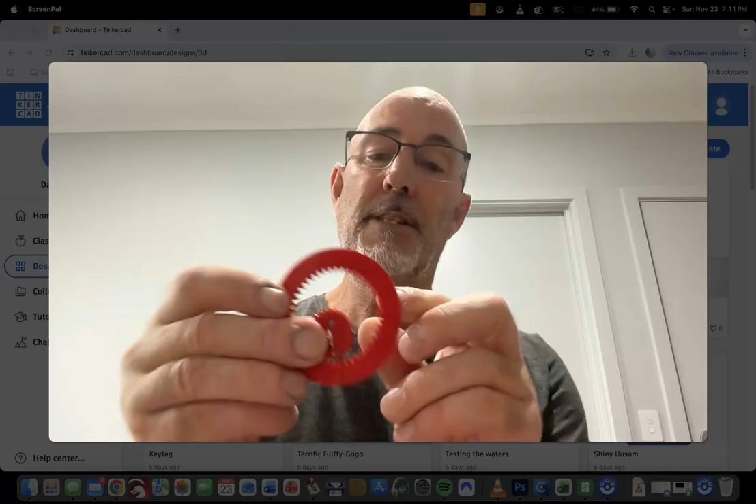This week, a simple task using the skills you've done already. I'm going to make a fun thing - you go, ooh, a gear, and ooh, another gear, but when you put them together, kids love these things. It's a Spirograph, or my version of one, using a couple of gears and a cylinder. Doesn't take long to make, doesn't take long to print. If you're doing these as a class set, kids love designing them and then making cool patterns with them. So let's make a Spirograph - it won't take you long at all, and it won't take the kids long either.

So into Tinkercad, like so. Alright, so we're going to use some of the readily made features or shapes in Tinkercad today.

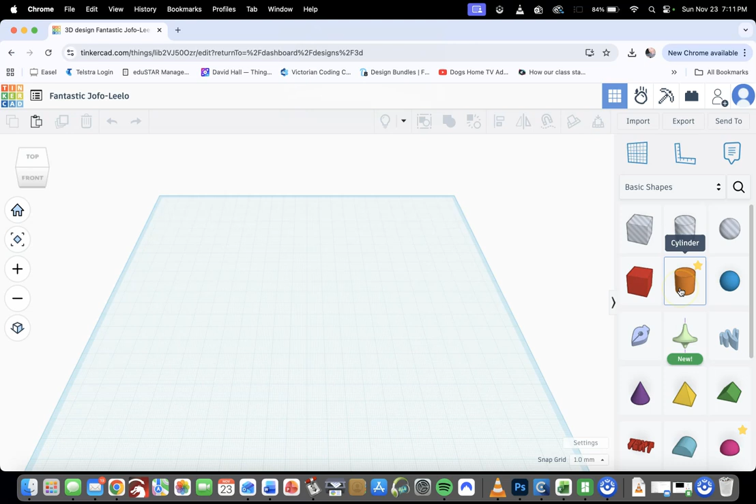To start off with, we're going to drag a cylinder onto the work plane - it doesn't matter where we put it - and resize it to be 70 by 70, and make it 3mm thick. Not too fat, not too thin, just right.

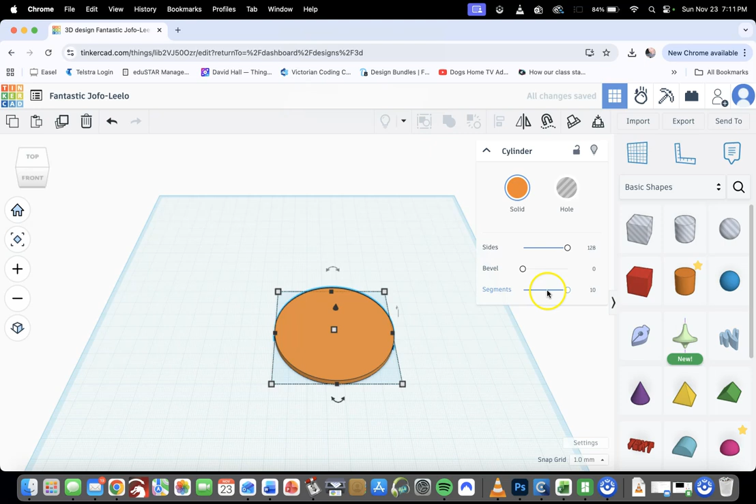We're going to turn our sides up to be the maximum and our segments up to be the maximum. I haven't done a bevel on this - you probably could if you wished, but I haven't. So that's our first component made, 70 by 70 by 3.

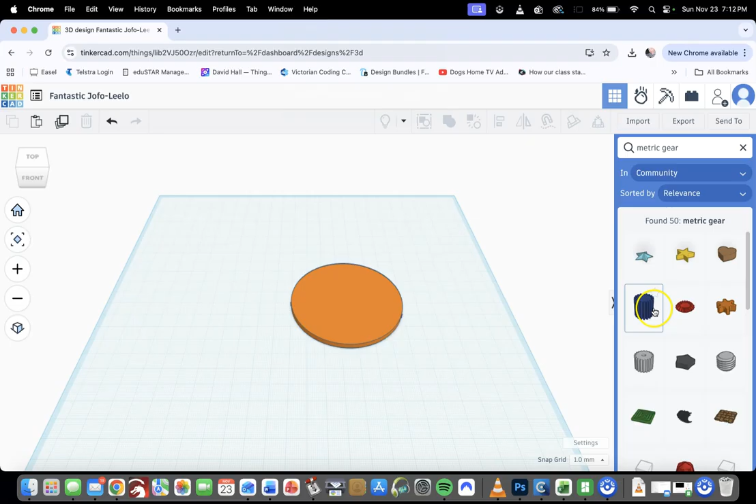The next one, we're going to go over to the search here and type up metric gear. You'll get a few things like this, and the two that we want are this one and this one. So we're going to drag this blue one out, like so, and we're also going to drag this one out, like so.

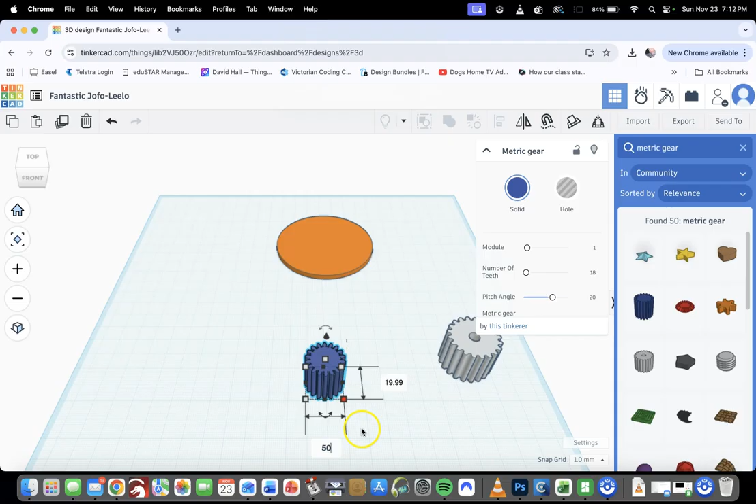This one is going to become our little wheel that you put your pencil in and draw around. This one is going to become the center. So if we click on this one, I'll move it up the front, move that to the back, and we're going to resize this to start off with - it'll be 50 by 50, 50.

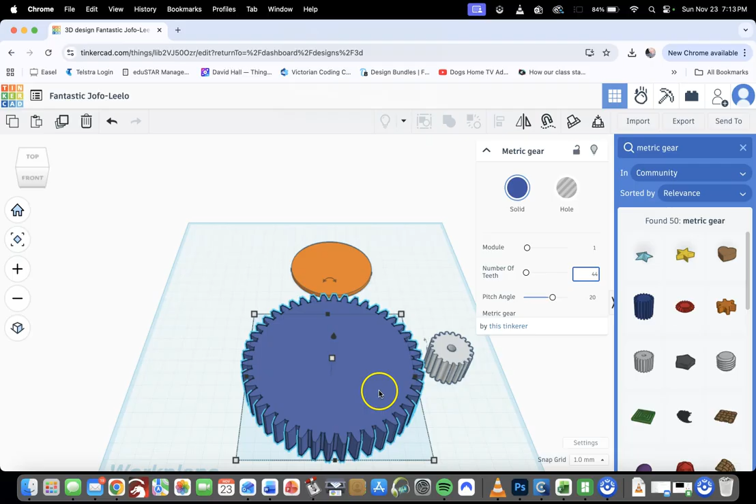I'm not going to worry too much about it, because as soon as I change the teeth on this, which we have to, it changes the dimensions as well. So we're going to change the teeth over here to be 44, like so. As you can see, it's smashed it out and made it huge. So we're then going to resize it to be 50 by 50. I don't know why it does that, but anyway, it does.

So 50 by 50, and now I can make it 3mm thick. This is going to be our center piece. So that's the metric gear with the teeth that are 44.

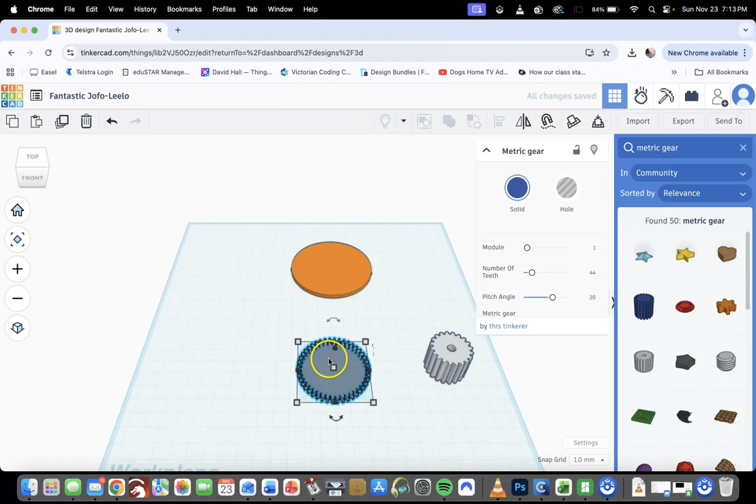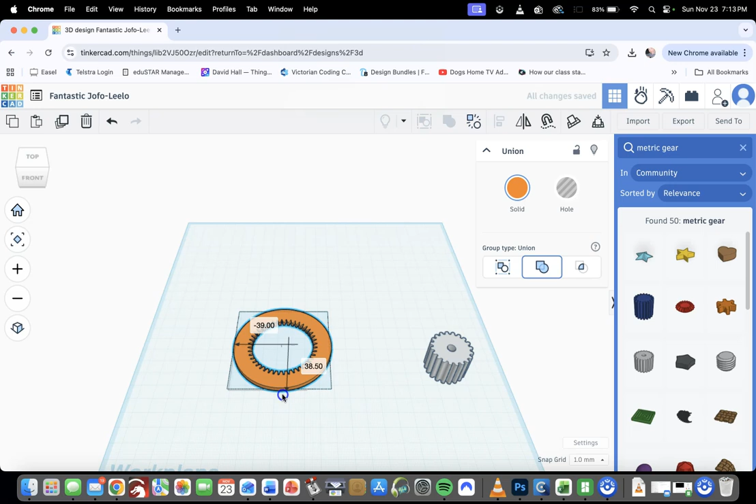And we need to turn it into a hole. I'm going to press the H key. And we need to align these two and group them, so we're going to put these two together. Press our align tool, hit center, and then group - union group. And that cuts out the center bit so that we've got our wheel that we're going to run around the inside of.

Now for this one - I told you this is not going to take a long time. The amount of teeth on this one - I did a little bit of research, and you might be going, how do you know it's going to mesh? Currently it doesn't, well it kind of does but not overly well. So I changed the teeth to 25.

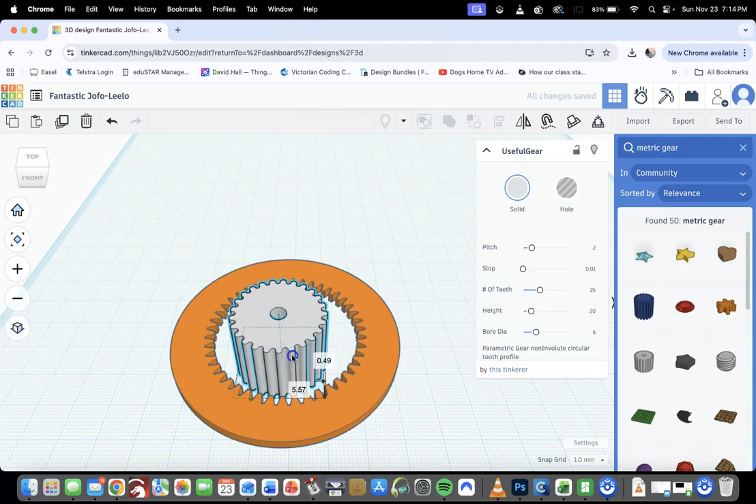And then we changed the diameter of this to 26 by 26, like so. You'll see as you drag it in, the mesh is pretty good. We also want to change the thickness to be 3mm, same as everything else, like so. So there is the center wheel - you can see the teeth mesh just nicely, and we'll drag it in, and yep, that's it.

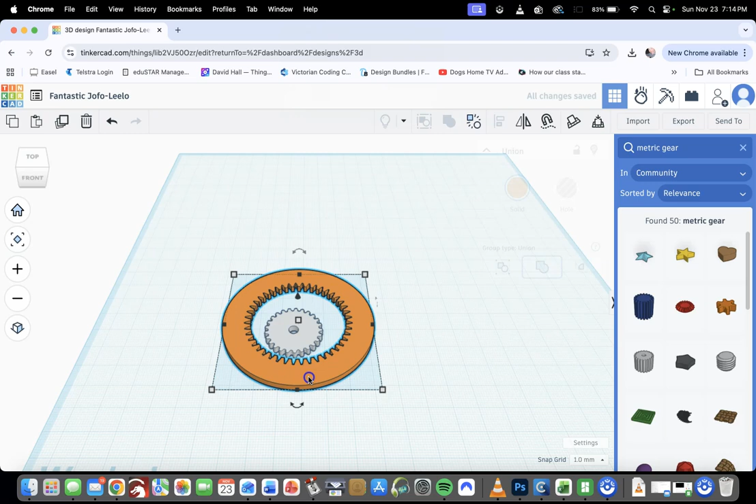So 70 by 70 for this one, 26 by 26 for this one, 25 teeth and 44 teeth on the inner wheel. Now I'm just going to drag this out, drag this over to the side. Because that gear is in the center of that wheel, it will only draw a circle, so we want to actually have it do some cool patterns.

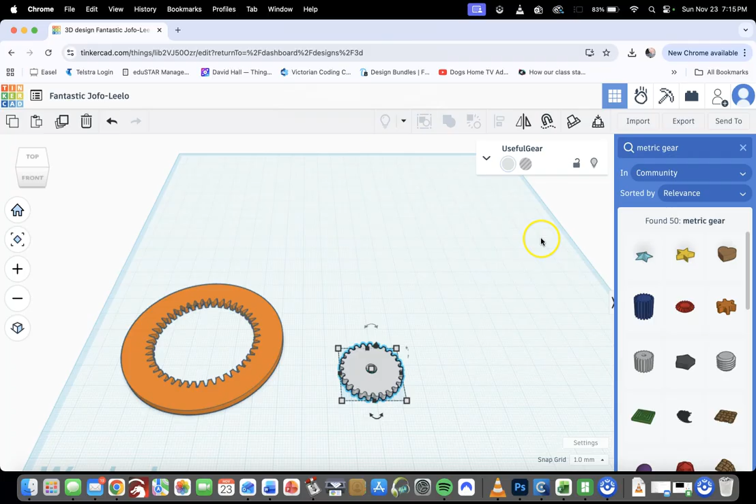So if we go back to basic shapes, we're going to drag out a cylinder, and change the size of that to be 3 by 3 - big enough to fit a pencil, big enough to fit a pen as well. And I'm going to hold down the Alt key and select that one - Alt creates a duplicate when you click on a shape.

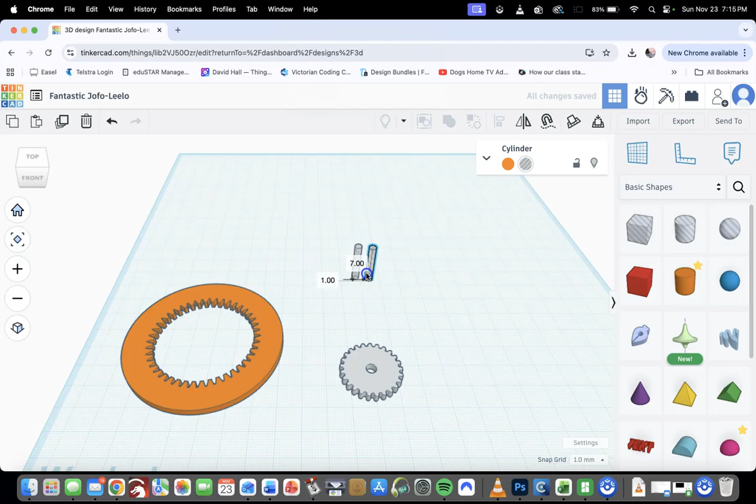So instead of using the duplicate tool, you can hold down the Alt key, click on a shape, and just drag another one out from it, like so. We only want 2 of these. I'm just going to line them up a bit, and they don't need to be too far apart because our gear is not massive.

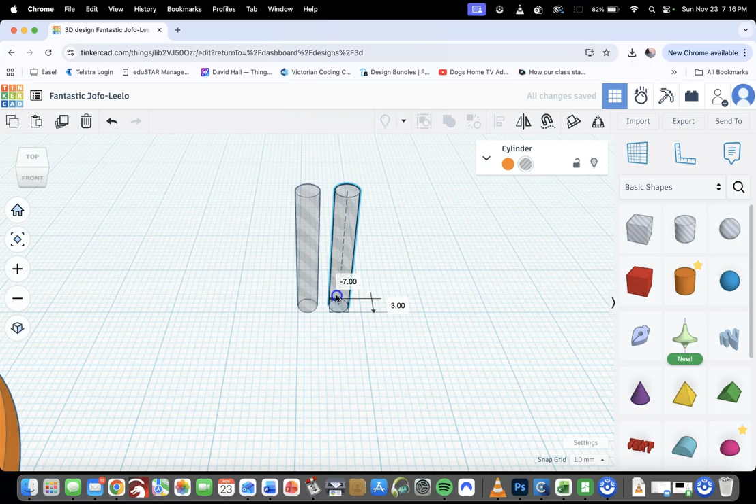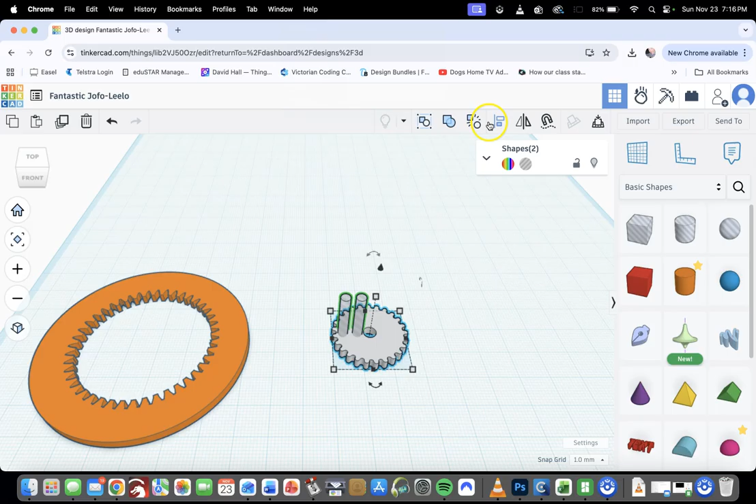I'm just going to sort of put them there, and I'm going to group them, bundle grouping them for now, so it locks them together but doesn't turn them into a whole. Coming over here, I'm going to put them into my little wheel and align them, left click and drag, and align them just to the center.

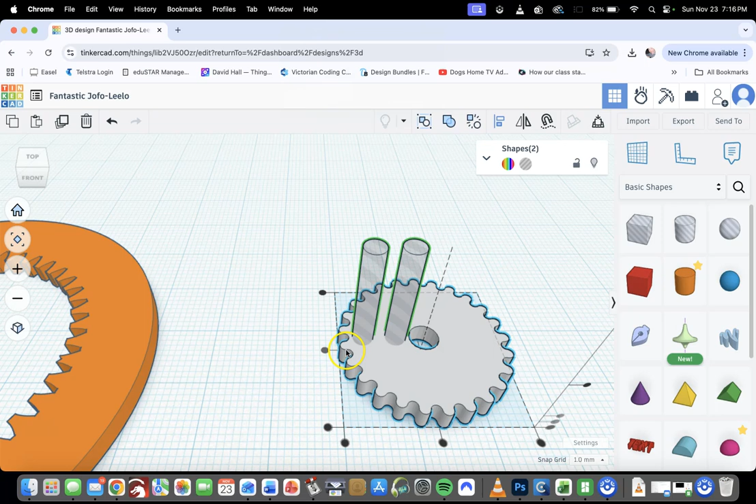I just want to have a look as we do this, to make sure that hole's not too close to the edge. I've seen a lot of kids this week making this, and the hole ends up right here. So just check, and if it is, try and move that gear around, do a rotate on it a little bit, and that's fine.

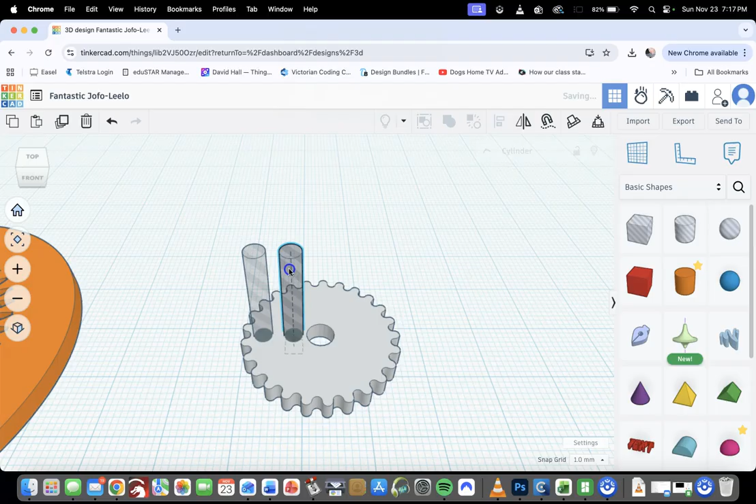So we now want to put maybe one more hole there and another hole there, and we won't do this side, I'll tell you why in a second. I'm going to ungroup these two, then hold down Alt and drag one out, put it here, and hold down Alt and drag another out and put it about there. Randomly spaced, different places to the other ones. I didn't put too much effort into where, just not on this side, and I'll tell you why again in a second.

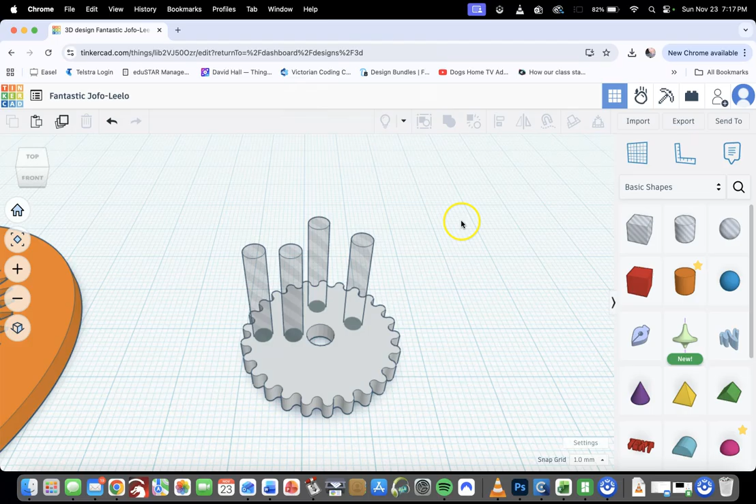Now, selecting all of those, we will group them, and that gives you your 4 holes, so your 4 different patterns. This one will give you a circle, these ones give you sort of a flower pattern, and these will do the same when you roll them around inside.

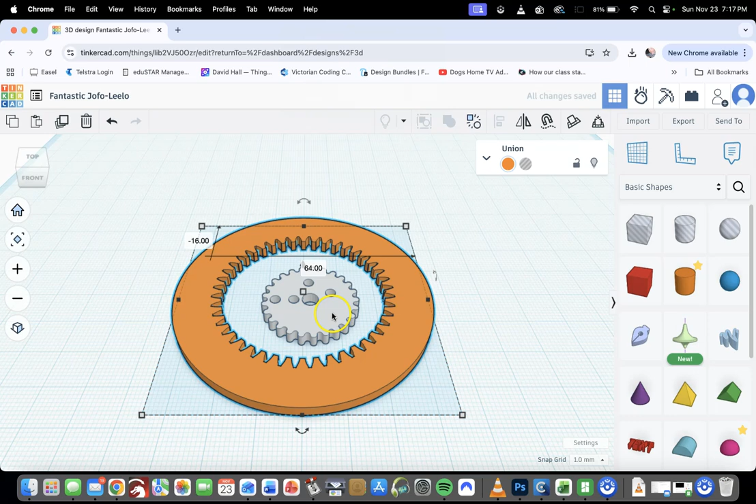Now, the reason we didn't put anything on this side is because in the classroom, if you're printing these, you'll want to be able to - if you've got 10 of these going on the print bed at the same time and they all come off, you're going to have all these kids going 'well, which one is mine?' So in this step, I just put the name on.

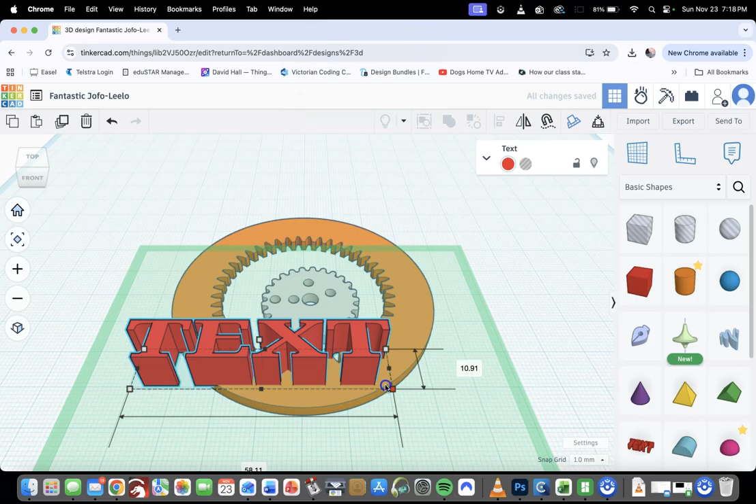So I just drag some text out, resize it, and make it 1 millimeter thick, and then resize it so it sits however it needs to be. I'll change my name so it says Dave, like so, and it still sits roughly there, which is good.

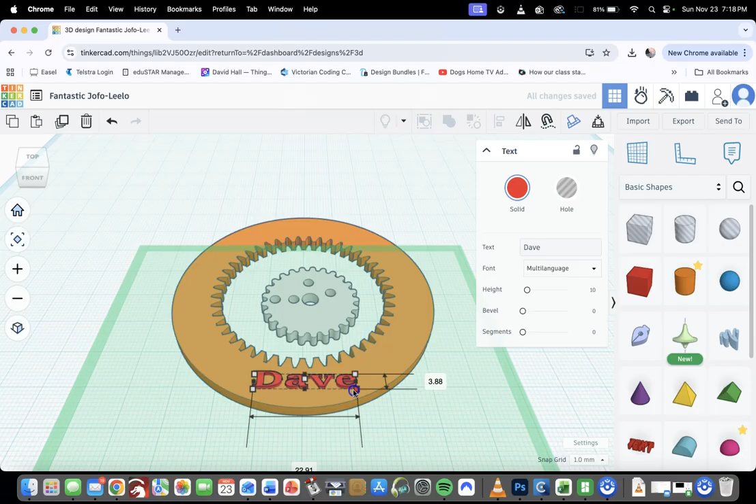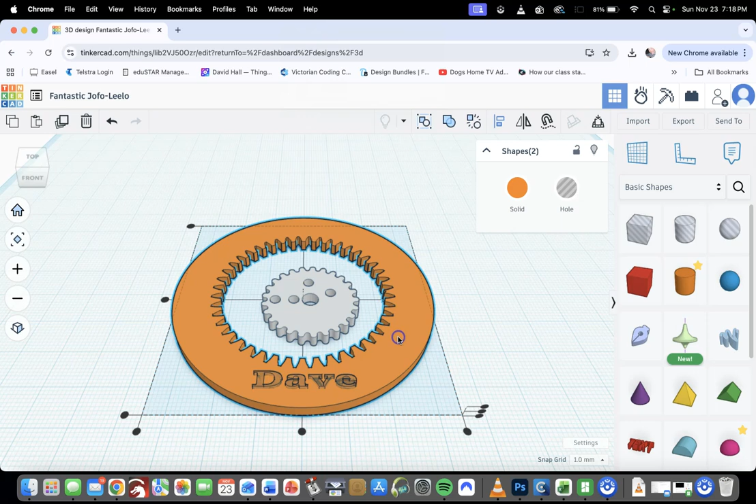I'm going to turn it into a hole, and then select both those shapes, hit the Align tool. While holding Shift down, I'm going to left click on this shape, as we found in other lessons, so the wheel doesn't move. Then I'm going to align it using the top one, which pushes or engraves my name down into it, and then group. All right, so that's my name in this one.

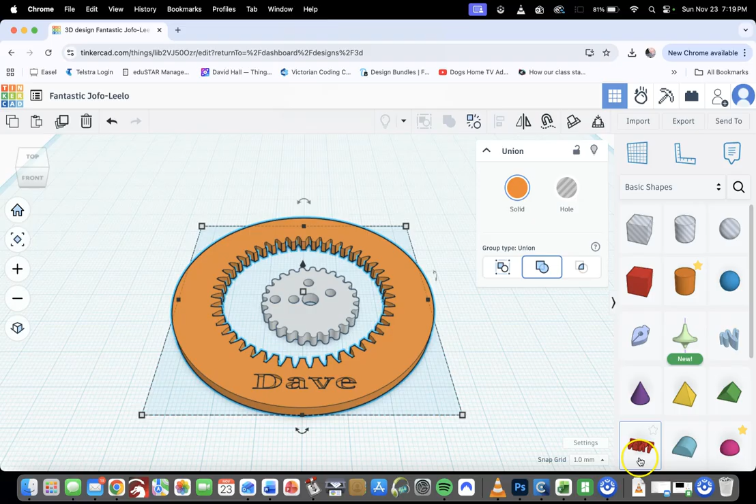And I'm going to perform the same function here, so that when kids are getting this task coming in at the end of the day to collect their prints, as my students do, they're not having this issue of 'that's not mine' or 'this is mine'. I won't print it - when I look at it and set it up in the slicer, if I don't see a name on it, I don't print it. So it saves all those issues.

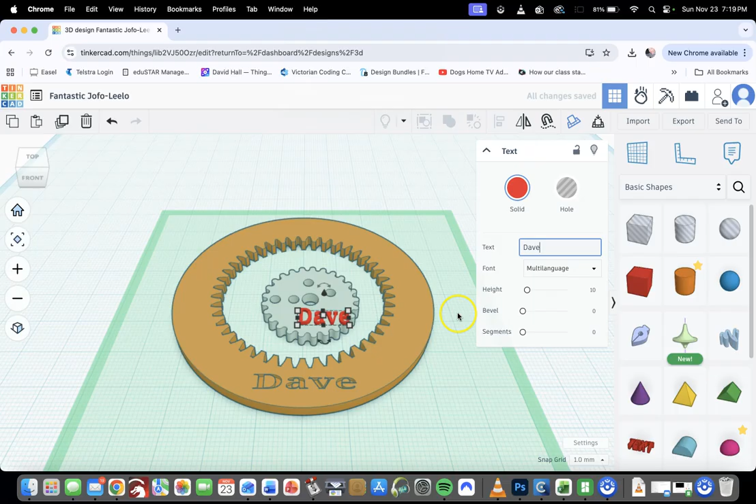I'm just going to redrag, change my name again, and put it sort of somewhere about there. That'll work, I think. Now I could just align it, or I can also just use this. I'm going to move that, use the cone, and I've just got to push it down 1 mil, and hit H, so it's a hole, and then group these 2 items.

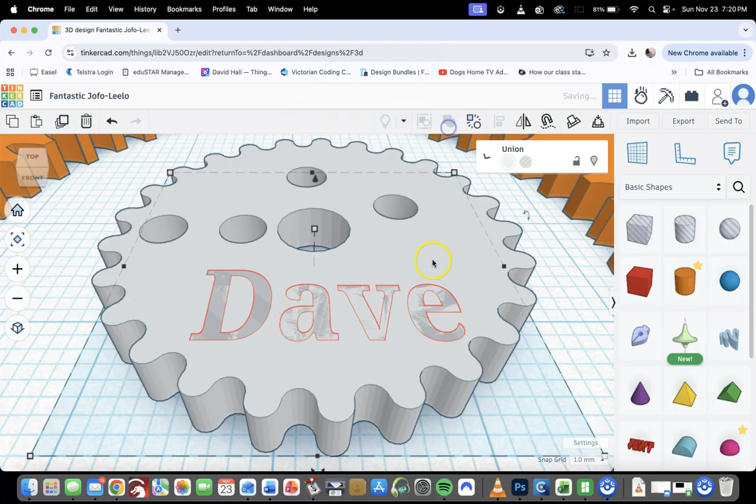Once I've done that, the text is engraved in, and I've now got a spirograph with my name on both wheels. It'll take about 25 minutes to print on a Bambu P1S, Bambu Labs.

So that is it. That was quick, I told you, but that is all that's involved in making a little spirograph. Kids will have a lot of fun with it - you'll see lots of little patterns appearing all over the place. And that is this week's tutorial, how to make a spirograph.

Next week, we will look at making - we might make a pencil cup. A little bit more tricky, but it's still fun to do, and kids can stick their pencils in it, and it goes with the pencil topper in the previous lesson.